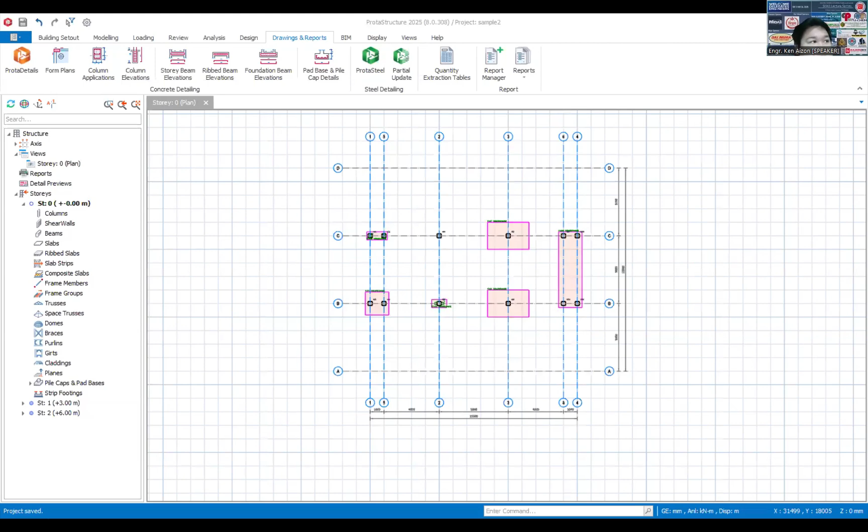Here, ProtaDetails. ProtaDetails 2025. So ito yung sa ProtaDetails natin. So Prota generate detail. Kung ano yung nasa Prota natin, ililipat niya dito. So may scale tayo, let's say 1:100. So draw.

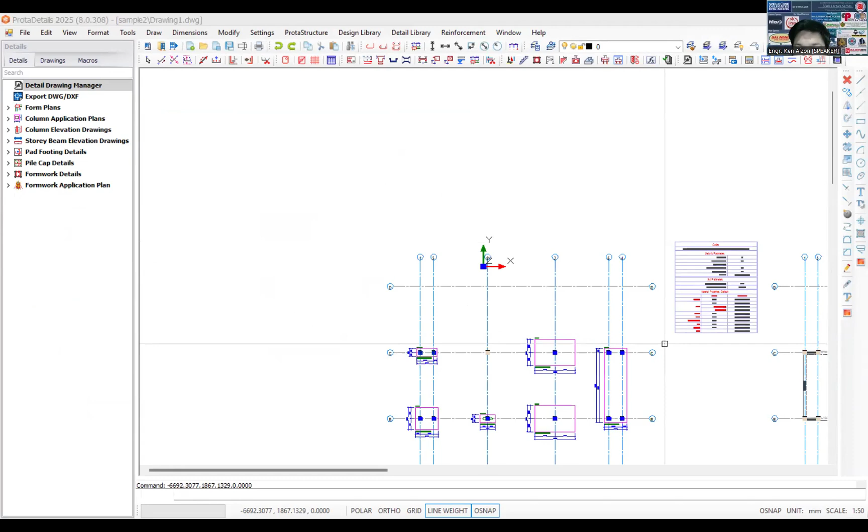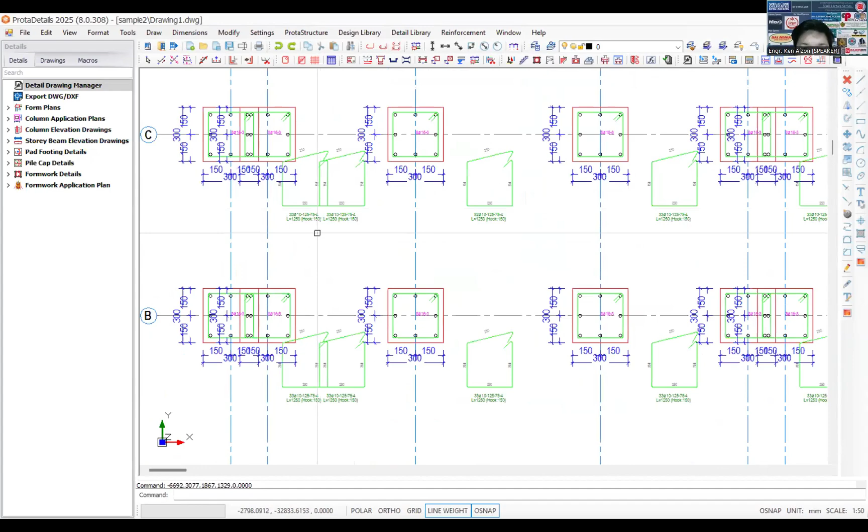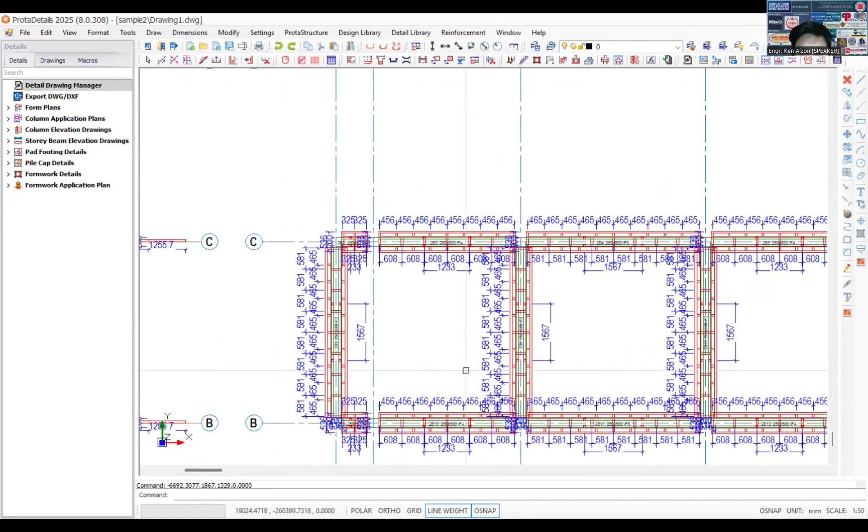Kung ano yung nasa ProtaStructure natin, may detailed drawings na tayo dito. So ito yun. So ito yung mga parameters natin kanina from our code. So ito yung sa columns, mga detailing natin. And ito yung sa formworks, and yung sa formworks pa rin to. Ito pala yung footing.

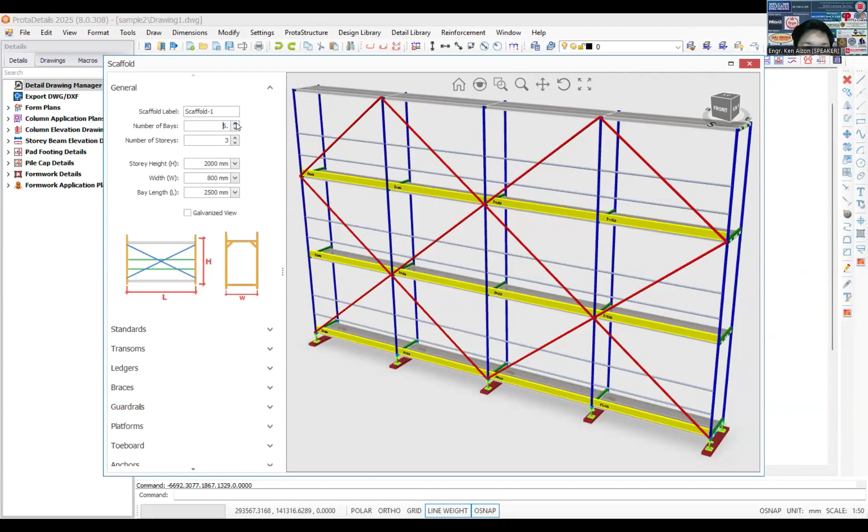So yung ProtaDetails hindi lang po siya basta for your detailed drawing. May steel facade tayo for scaffoldings, so you can also design your scaffolding. Automated na din siya. So number of bay, let's say sabihin natin 6. So may additional siya. So may mga materials tayo dito.

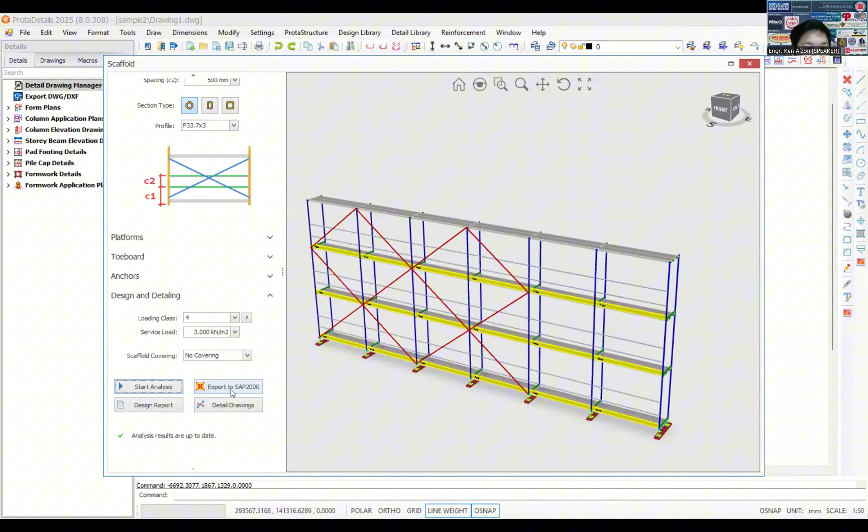Yung code na ginagamit niya is Turkish code. Since wala yatang code si NSCP regarding dito, so in design detail, start analysis. Pwede mo siyang export to SAP. So may report dito. Ito yung report ng scaffoldings. So naka-under siya kang Turkish code.

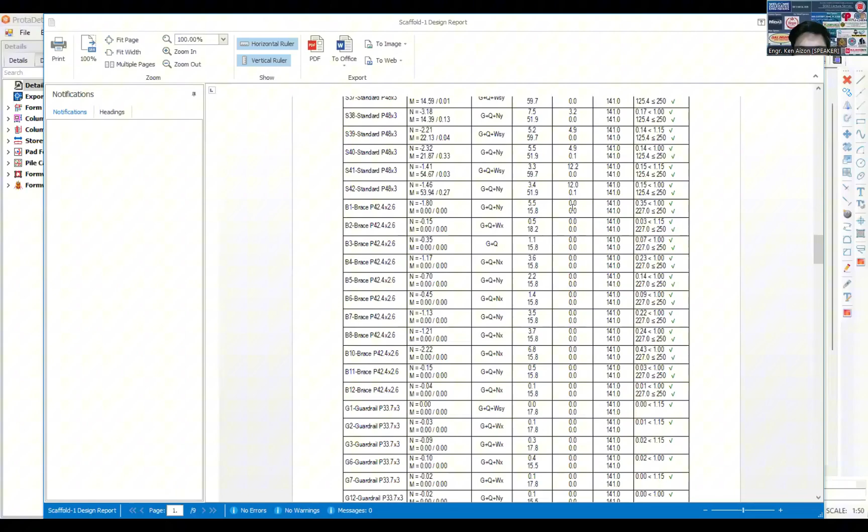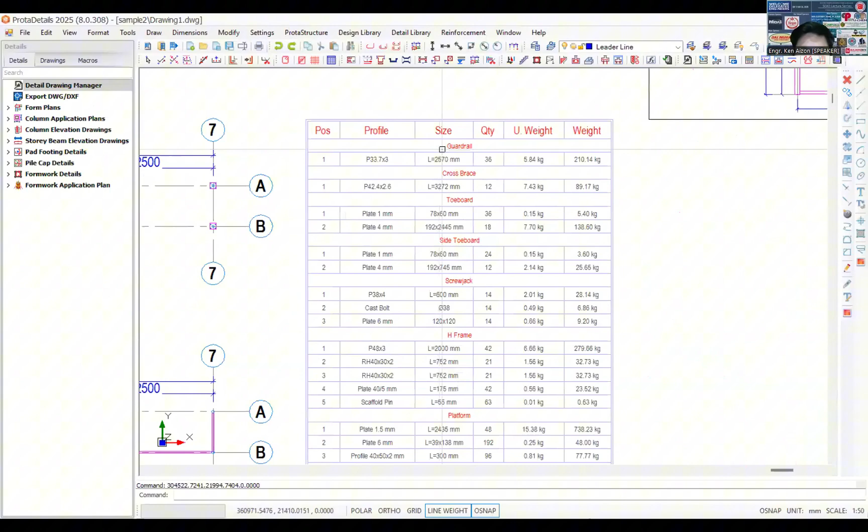So detailed drawing, select ko lang yan dito. Ito yung detailed drawings ng scaffoldings natin and yung mga quantity take off. Aside scaffolding, meron din tayong stairs. Ito na lang muna, cantilever retaining wall.

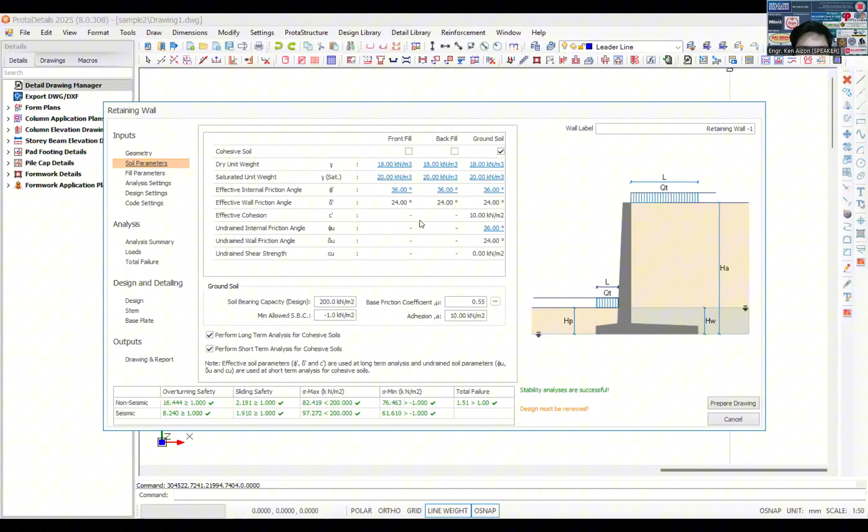Yung kailangan natin dito is ang soil parameters ng geotechnical engineer. Input lang yung dito, automated din siya. Yung geometry, pwede natin lagyan ng ito. Click mo to, pwede nang click mo ito. Yung selection niya is ito. Gawin mong straight nito, or lagay ka ng shear key.

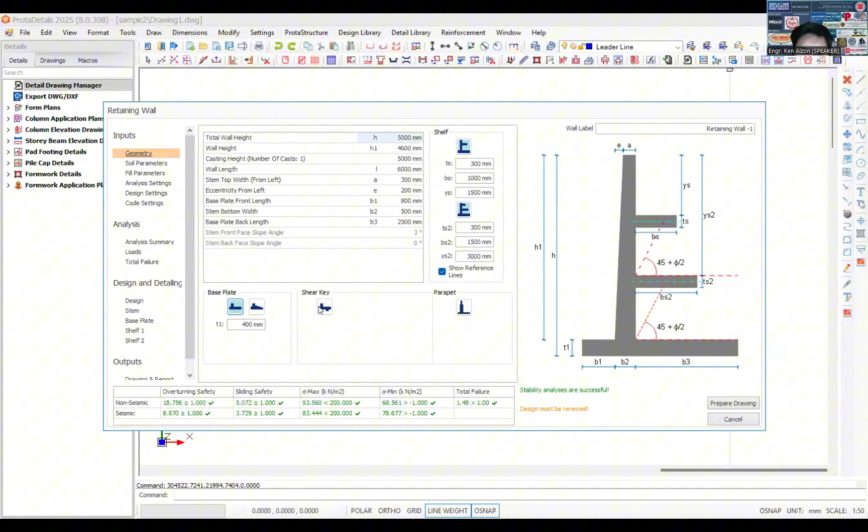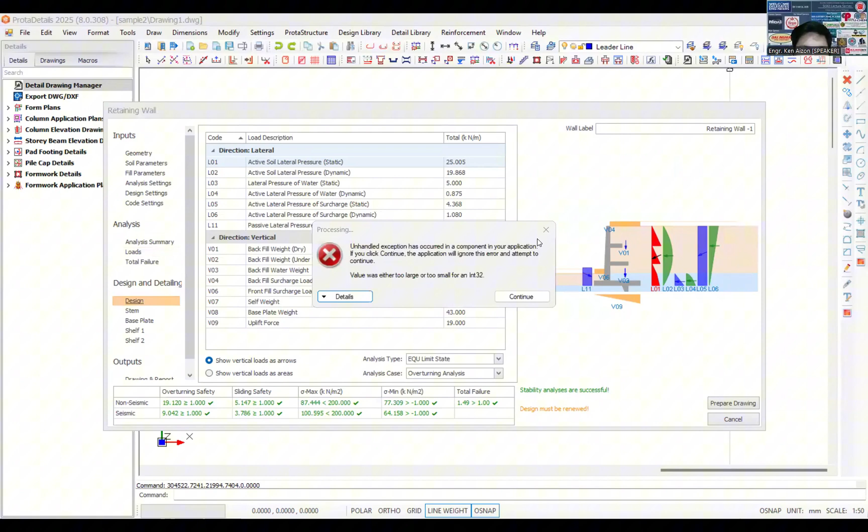So analysis, try natin ipapasa ko siya. Ito yung sa loadings natin. You need your geotechnical report. I think nag-fail siya sa design. Try kong pansin.

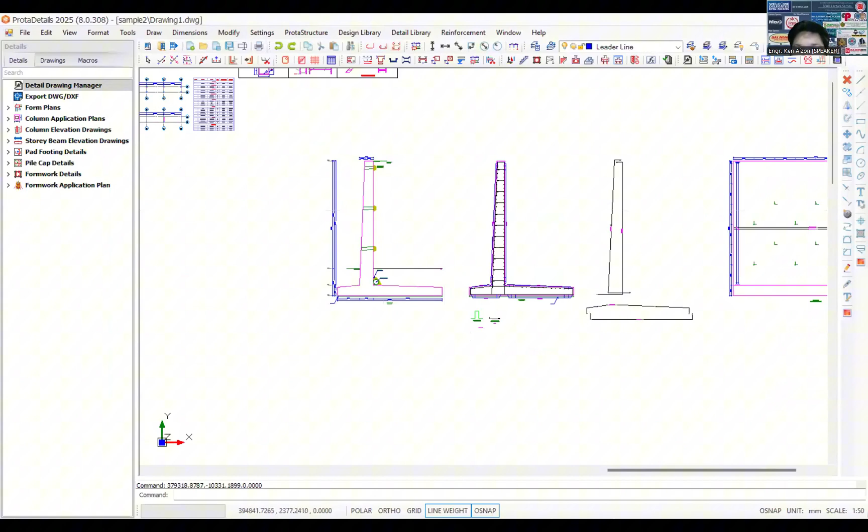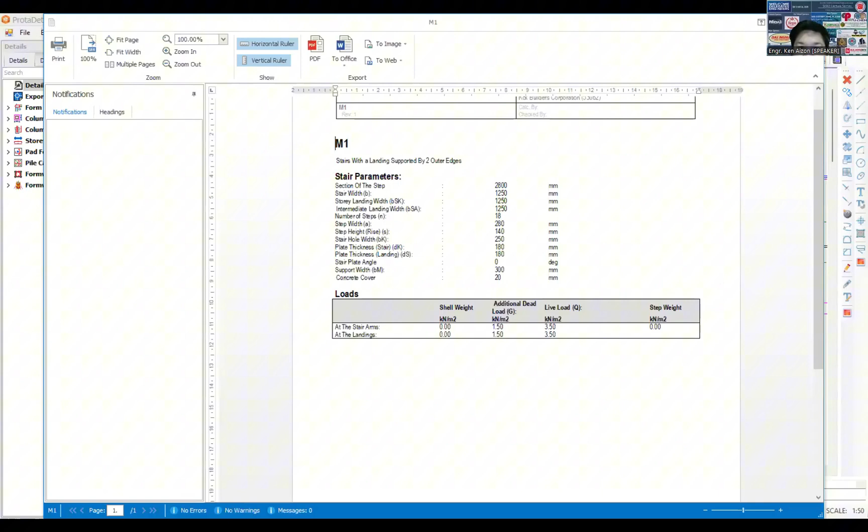For the, aside from that, may stairs dito. Pero si Prota 2026, pwede mo i-model yung sariling stairs sa model. So may design tayo, yung lalabas na detailed drawing. Ah, may mali yata. Aside from that, may retrofit walls.

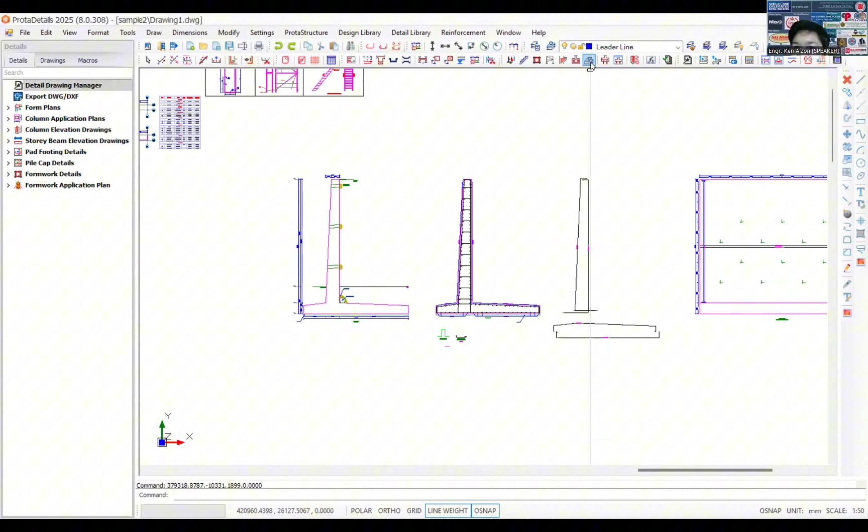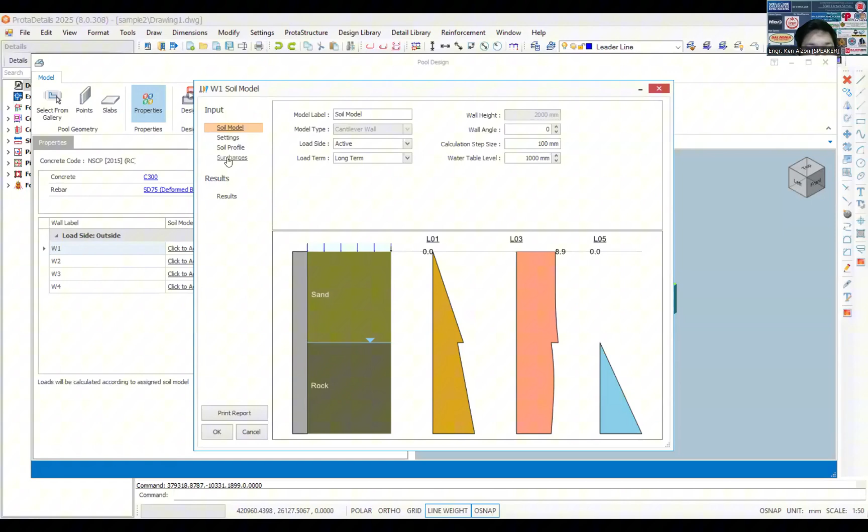Hindi ko kasi ito ginagamit, pinapakita ko na lang. May swimming pool din. So ito yung model natin. Basically yung hinahanap din niya is yung parameters. May properties dito is our soil parameters din from our geotechnical report.

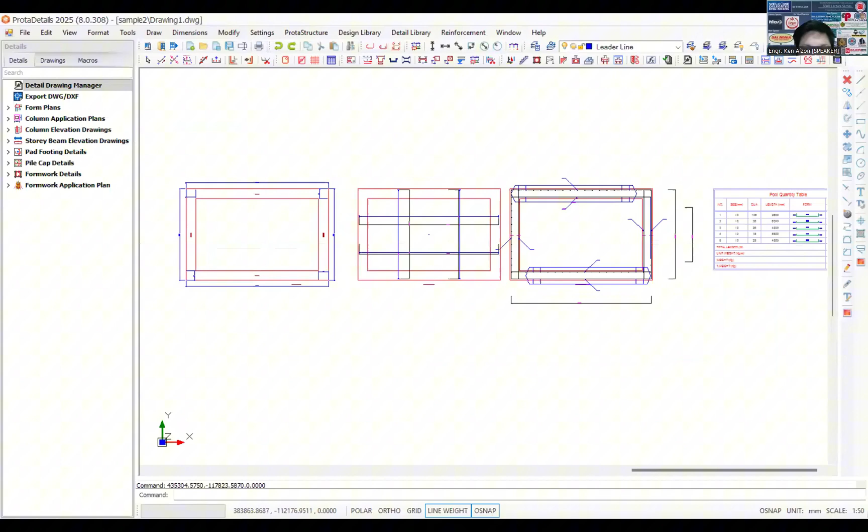Design, drawing details. Ito yung sa ProtaDetails.

Break muna ko, CR muna. Can I request a 5 minutes break muna? CR lang.

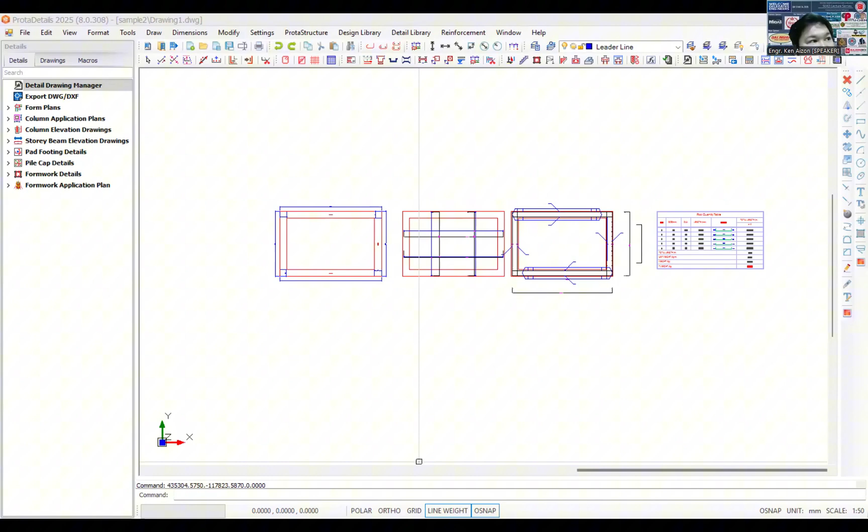So basically, ito lang yung workflow ni Prota. So if we're designing commercial or residential, mas padali yung trabaho natin.

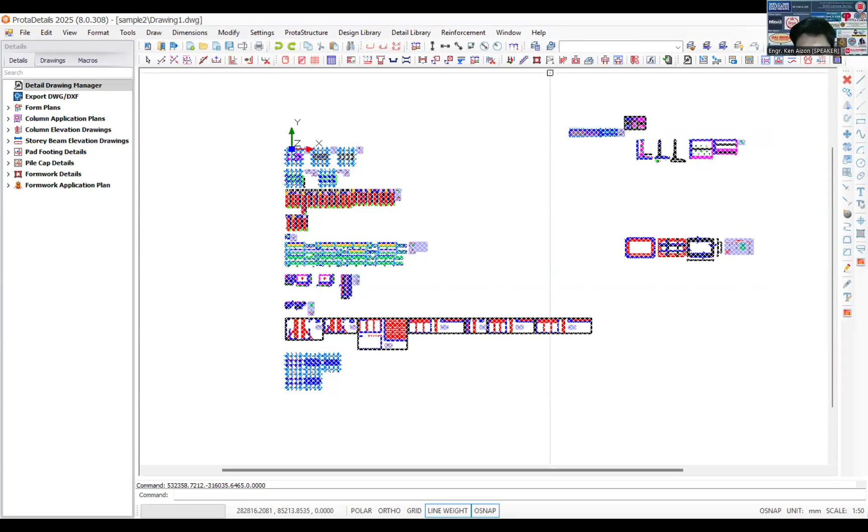Ibalik ko muna sa Prota yung screen. Baka hindi pa ako na-discuss. Show ProtaStructure. Loadings and review. Analysis design.

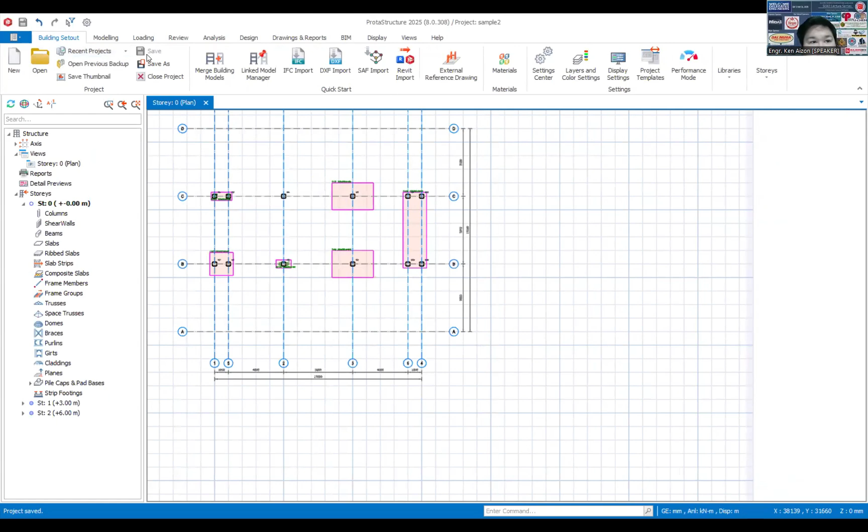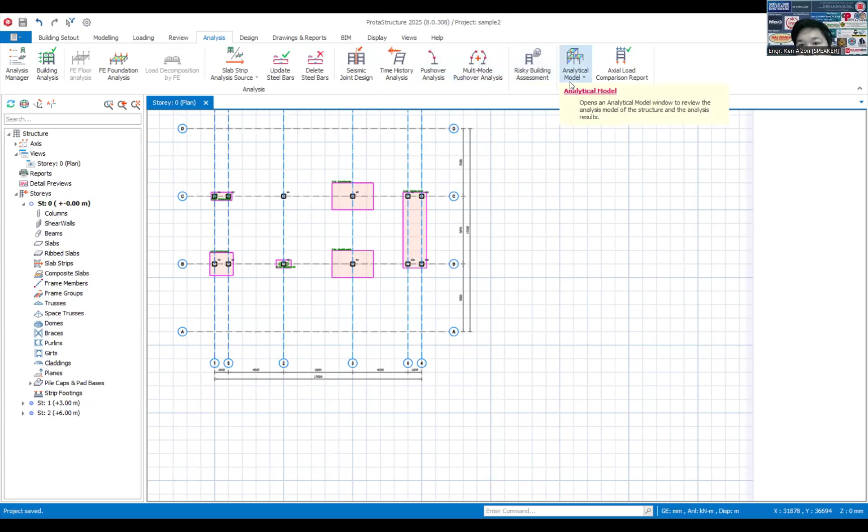So aside for structural analysis and design, if you go here on our design analysis, so we have seismic joint here, time history analysis, pushover, multi-mode pushover, risky building assessment, and our analytical model.

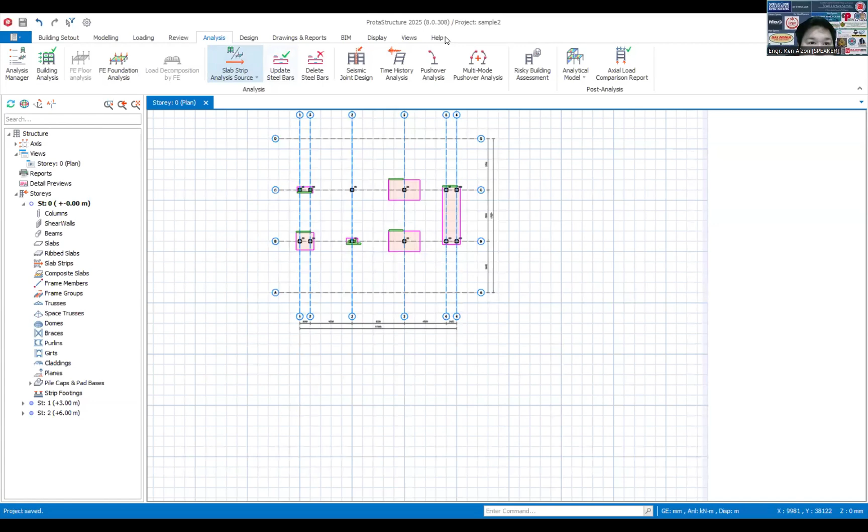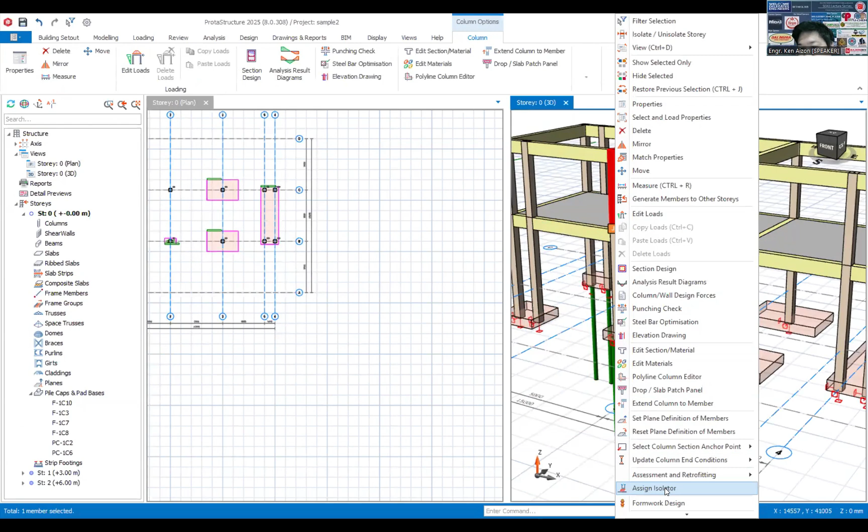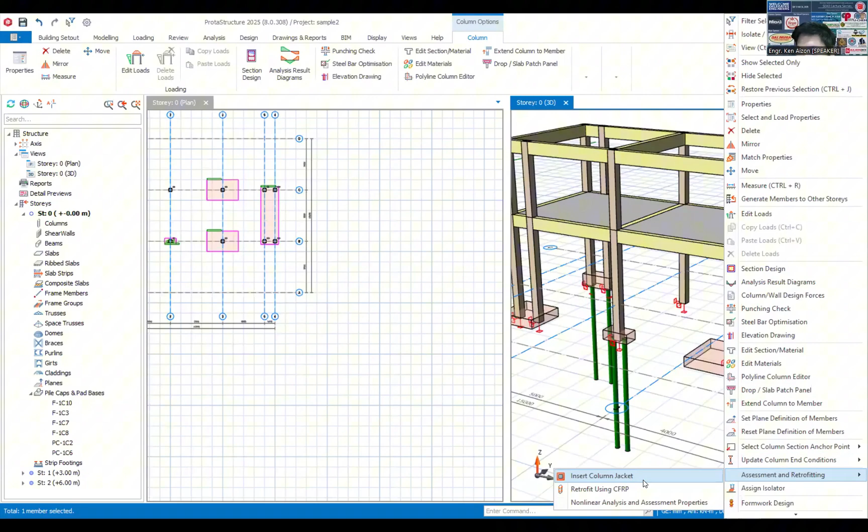As you can see, aside for structural analysis, kaya din niyang gawin yung existing analysis, yung ginagawa natin kang SeismoBuild. And aside from that, if we go to check 3D lang muna natin. So dito, as you can see, pwede tayong maglagay ng seismic isolators dito. Ito yung mga requirements niya. And for retrofitting purpose, pwede rin tayong mag nonlinear analysis and pwede tayong mag jacketing ng column, at mas madali yung CFRP natin, sorry.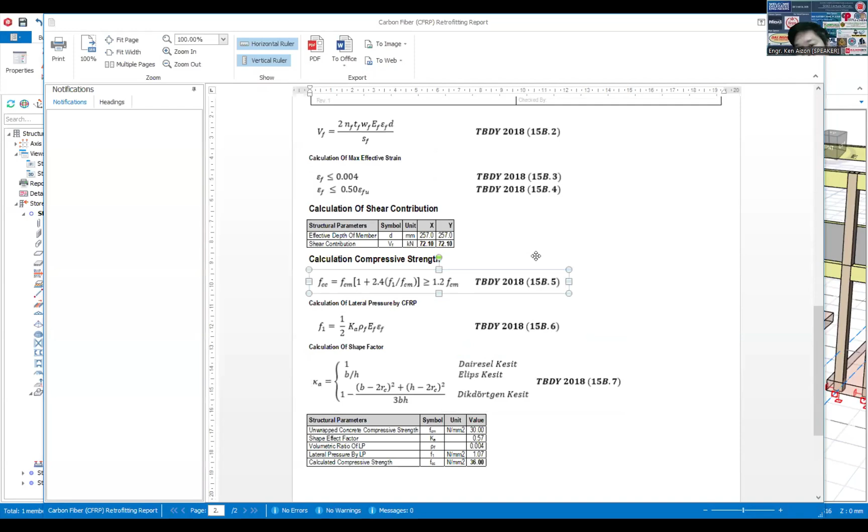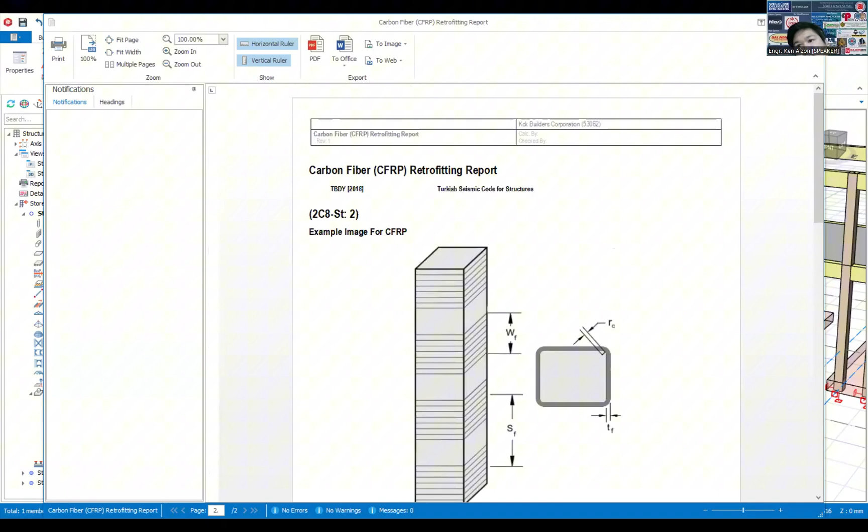So as you can see, naka-Turkish code siya, TBDY. TBDY is, I think, part din ng yung sa mga existing building. Part niya is si FEMA 416 and I think ASCE, merong ASCE doon. ASCE 7-16 yata, if hindi ako nagkamali.

Okay lang ba if mag-steel design ako?